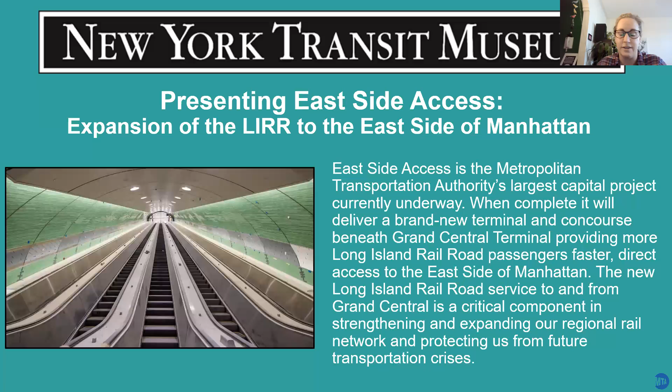In case you haven't visited us before, the New York Transit Museum started as an exhibition in the 1976 bicentennial, and it was so popular it became a permanent museum in the 1980s. In pre-pandemic times, we would serve more than 500,000 visitors a year. We are located in a decommissioned IND subway station in downtown Brooklyn, and we also have a gallery and shop in Grand Central Terminal. Our programs have gone virtual during the pandemic, but even though the museum is now open, we're continuing to host online programs on a variety of topics and for a variety of ages. The nice part is that this format really allows us to engage with museum and transit fans from all around the world. Thank you for being part of this today.

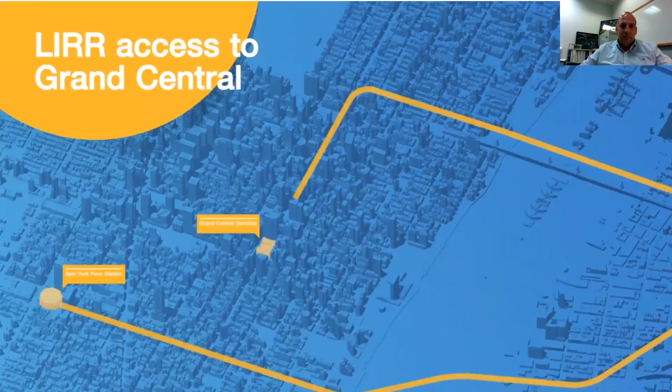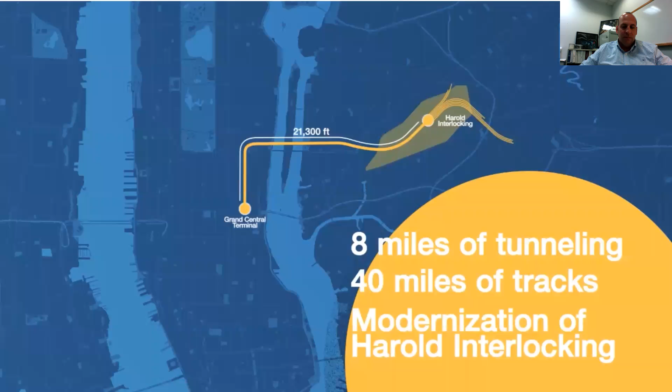Next, we're going to be just looking at a brief overview of the program with this video. East Side Access is the MTA's largest capital project, with work spanning 3 boroughs and extending deep below Park Avenue in Manhattan. The project will deliver for LIRR customers a brand new terminal and concourse beneath Grand Central, nearly 8 city blocks long, 8 miles of tunneling, 40 miles of new tracks, and the modernization of Harold Interlocking, the busiest intersection of passenger train lines in North America.

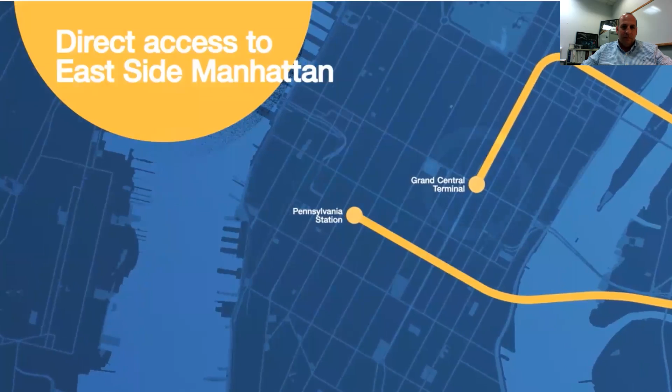East Side Access will deliver faster commutes, fewer delays, greater reliability, and more options for passengers. Long Island Railroad riders will now have faster, direct access to the east side of Manhattan, easing overcrowding in and around Penn Station. The project is also expanding and strengthening our regional rail network, protecting us from future transportation crises. East Side Access is the first expansion of the Long Island Railroad in more than 100 years. When the railroad was first built, 37,000 people lived on Long Island.

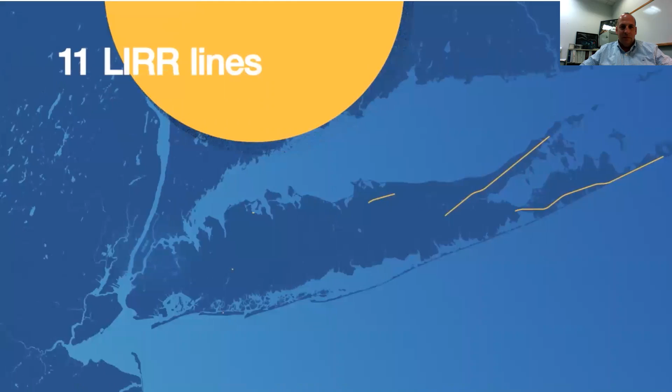We now have 2.8 million residents. To support that growing population, all 11 lines of the Long Island Railroad will now connect to Grand Central Terminal as well as Penn Station, saving commuters to Manhattan's East Side up to 40 minutes of travel time per day, adding up to 10 days per year.

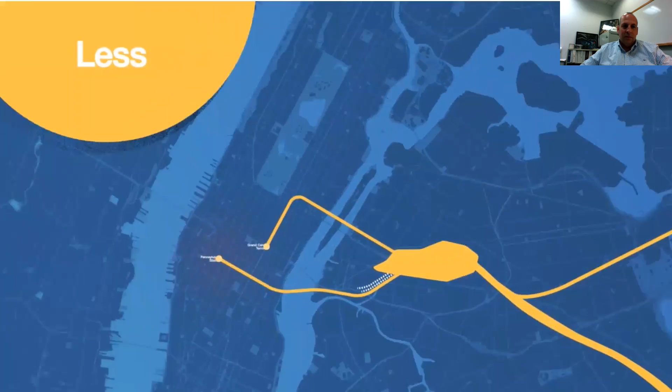With roughly half of Long Island commuters expected to go to Grand Central, there will be less crowding at Penn Station and on surrounding subway lines.

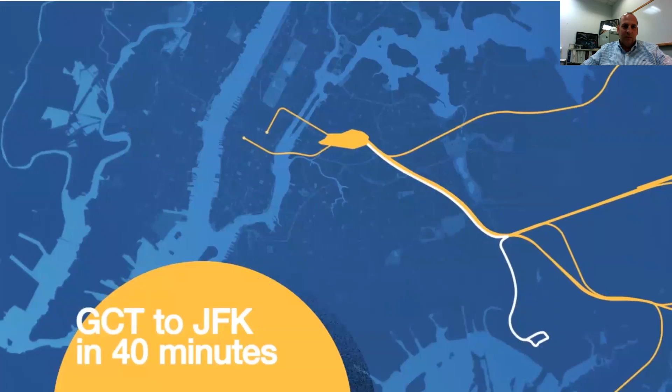East Side Access will create faster connections to JFK Airport, getting you from Grand Central to your terminal in roughly 40 minutes. And along with the construction of the third track and double track projects in Nassau and Suffolk counties, East Side Access will ensure we can meet the demands of Long Island's future population growth.

Long Islanders will be able to take full advantage of the job growth around Grand Central Terminal in the wake of the East Midtown rezoning. Better reverse commuting options from New York City to Long Island will expand job opportunities for New York City residents and help Long Island businesses attract skilled workers, strengthening the island's economic health and future prosperity.

Then there's the brand new Long Island Railroad concourse and terminal. Built directly below Grand Central Terminal and Park Avenue, the new 1,000-foot-long terminal can accommodate 8 trains at a time, enabling service for up to 24 trains during peak hours.

Passengers will have easy access to Long Island Railroad through multiple entrances along Madison Avenue from 42nd Street to 48th, and many more within Grand Central itself. There will be cellular and Wi-Fi coverage throughout the terminal, and all digital signage will provide real-time information about train departures. Overall, this new destination includes 350,000 square feet of new space, including 25 retail storefronts and space for pop-up shops to meet the needs of daily commuters.

A critical piece of our transportation system is Harold Interlocking. Built over 100 years ago, it is the busiest intersection of passenger train lines in North America. With nearly 800 trains passing through each day, the potential for congestion and delays is significant, impacting daily commuters.

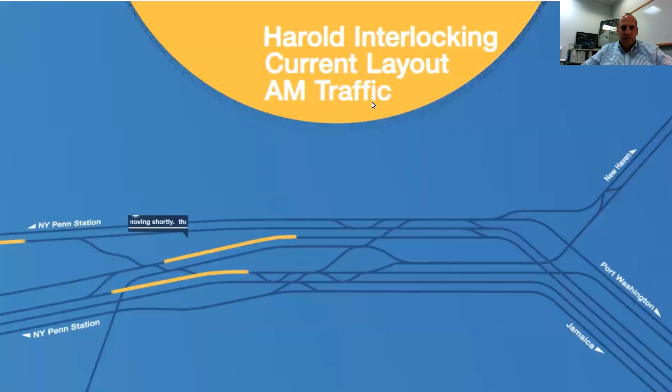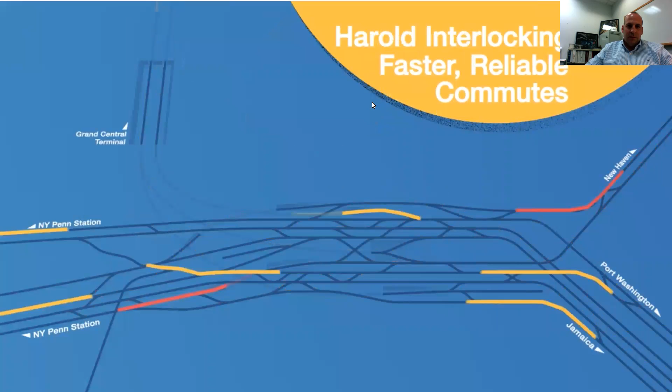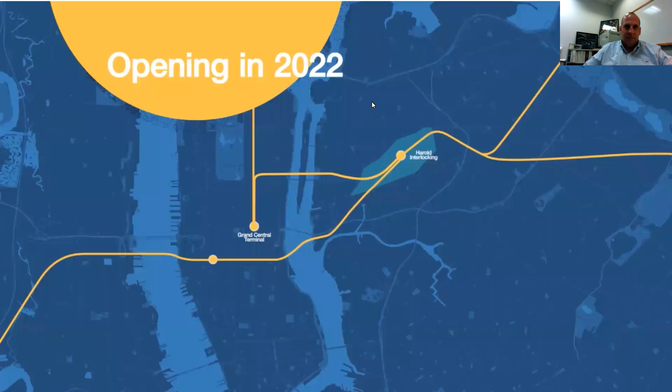So East Side Access is modernizing and transforming Harold to eliminate that congestion and reduce delays. Over $1 billion is being invested to make sure that you have a faster and more reliable commute now and in the future. This ambitious and transformational project for Long Island Railroad and the region's future is slated to open at the end of 2022. East Side Access will make our regional transit system faster, more resilient, more connected, and more reliable for our future.

So once completed, East Side Access is going to be changing the transportation in the region for generations to come. And there's several benefits that the video discusses. Next slide, please. Several benefits that the video discusses, like faster commutes and less crowding.

For a program of this magnitude, one can imagine that there's several key stakeholders, and I'd like to take this opportunity to thank our partners at the FTA and the FRA for their support. In addition, I'd like to thank our railroad partners, as there's a significant amount of coordination and planning that's required in order to build a mega project in and around active operational railroads.

So who is MTA C&D? MTA C&D is actually a subsidiary of MTA, and they were a new subsidiary that does the capital planning and development for all the operating agencies. Currently, they have over $51 billion in their portfolio for planned work over the next 5 years.

Let's take a look in a little more detail at the alignment of this project and what it'll be. So currently, you have the Long Island Railroad comes in from the east and goes through Harold Interlocking, where it connects with the East River tunnels going to Penn Station. And that's where all the Long Island Railroad service goes today.

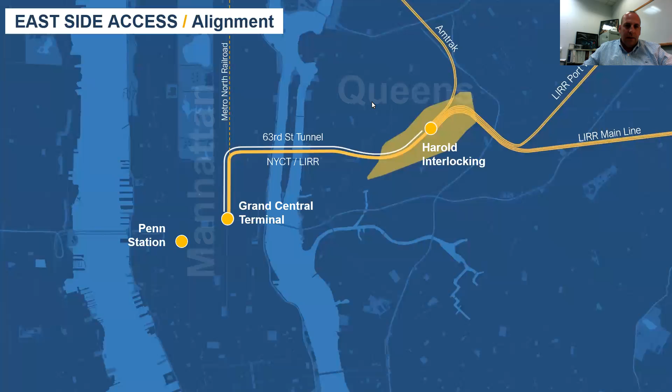And then we've also done a network of new tunnels in Manhattan and reconfigured and connected to Grand Central Terminal. So the new service will come in from the east, from the Port Washington or mainline branches of the Long Island Railroad, go into Harold Interlocking through new network of tunnels across east, going west towards Manhattan through the 63rd Street Tunnel, turn south down under Grand Central Terminal.

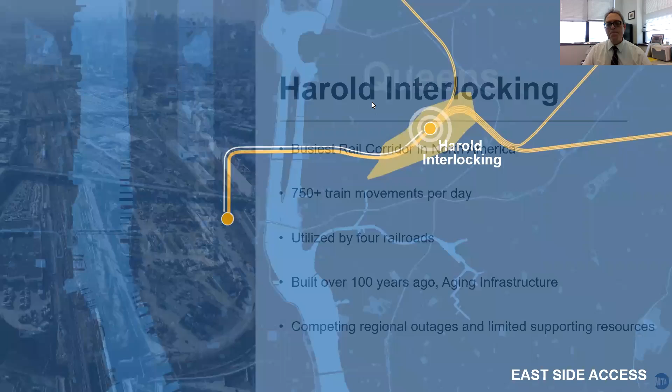We're creating a new alignment to bring the service into Grand Central. Harold Interlocking, as you guys heard, is the busiest rail corridor in North America.

Over 750 train moves a day, utilized by 4 railroads, predominantly Amtrak and Long Island Railroad. But you have the New Jersey Transit trains coming from Penn Station that also lay up in Sunnyside Yard, and occasionally we have a short line freight railroad, New York Atlantic, that comes through the interlocking as well.

All this goes back over 100 years to the Pennsylvania Railroad, so there's aging infrastructure, and that's been a big part of our project as well, rebuilding all that aging infrastructure. Some of the major challenges are the competing regional outages that are happening.

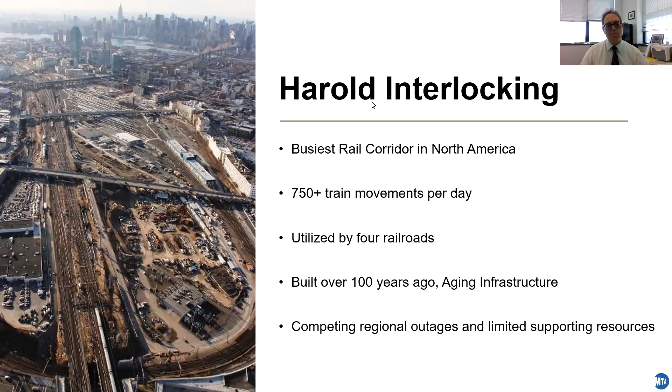Over the years there's just been a lot of work happening in the area, at Penn Station, West Side Yard, East River Tunnel work, and even work on the east end of Long Island. They all compete for the same resources, and the outages and maintaining the operation is always key. So that's something we've had to work through. Just the challenge of working in this active rail environment is really the biggest challenge we face in being safe. Next slide, please.

So the magnitude of the scope here is, we're putting in 95 new turnouts, putting in over 10 miles of track, and it's an expansion of the whole interlocking.

We've put in 5 new railroad bridges, replaced the signal towers, 313 catenary poles. Most of those foundations are dug by hand, pretty much because of the logistics. We cannot get equipment out there in the active rail environment with enough time to do it.

Also in terms of the expansion, we're putting in retaining walls, a new signaling system, new traction power systems. Going into the operational piece here, as I talked about, this mixing bowl.

So you can see here up at the top right, Amtrak coming from the New Haven line, Long Island comes in. Part of the issue here is that you have these mixing points, and these are points where the 2 railroads have to wait for each other, and it creates congestion.

That's some of the pieces that we've been trying to improve, as well as create the expansion of the tunnels for East Side Access.

So as this moves down to the west, you have the moves that go into the 2 East River tunnels for the westbound side, and then you have 2 East River tunnels on the eastbound side that come out. The Jersey Transit and Amtrak trains also make moves via the loop tracks that come around into Sunnyside Yard. Move to the next slide.

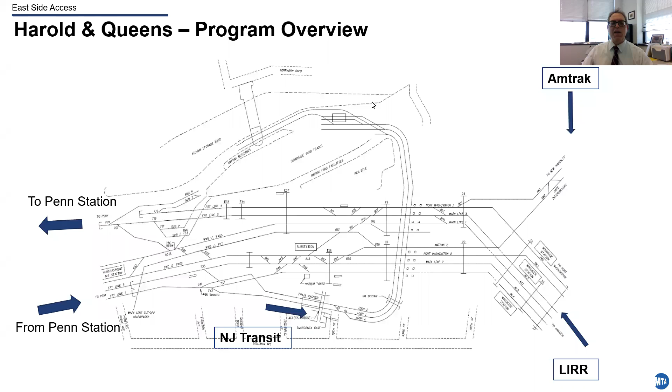But for the core East Side Access, we have a new midday storage yard up at the top there. We have the 3 bore tunnels into the middle of Harold, with the approach structures coming up to the daylight there. We have a series of track switches, and then we also have the railroad bridges that support that expansion.

We also put in railroad bridges for that expansion of what we call the westbound bypass on the top side. There's an eastbound reroute, which comes up in the middle for the Amtrak moves to remove some of those conflicts when they come out of these river tunnels there. And then we're also improving the moves on the loop tracks.

So there's a replacement car washer for Amtrak, a rebuild of the loop interlocking, a creation of a new T interlocking as they make moves going around into Sunnyside Yard. And again, it's increasing capacity, speed, and just overall reliability.

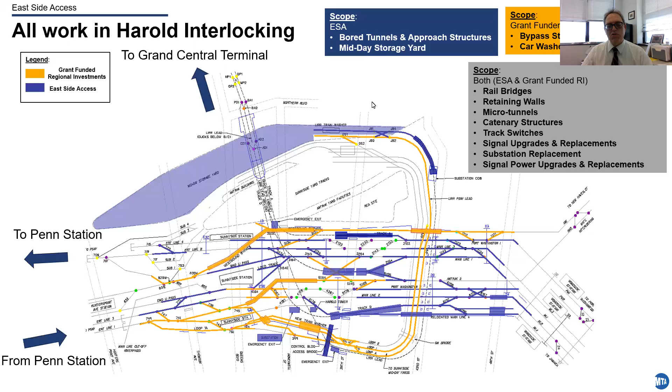Next slide. So I just want to give you guys an overview, and this will get a little bit busy, but just to give you a typical day of the moves that will be happening once we open up. This is going to be like your AM moves from Grand Central. The Long Island Railroad will be making a move from Grand Central.

You can just click through this as I talk to it. Into the midday storage yard. Also, Amtrak and Jersey Transit will be making moves into Sunnyside Yard. And then the Long Island Railroad will also have the ability to make moves from Penn Station into their midday storage yard.

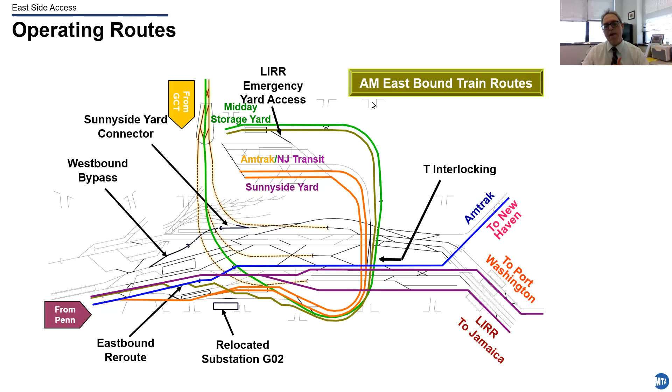Amtrak will make moves here through this new eastbound reroute, removing those conflicts that we talked about to get up to the New Haven line. And then the Long Island Railroad will be making moves from Penn to Port Wash and to Jamaica. And then you can see from Grand Central, they'll be making moves to Port Wash and to Jamaica.

And then we move to the westbound moves. So here it is, the Amtrak coming up into the expanded right of way, removing that conflict that exists, going to Penn. And then we have the Long Island making moves into Penn, Grand Central.

And then we have the ability to use the bidirectional tunnel to also make moves into Grand Central and still make other moves into Penn. And then Long Island will still have their Hunters Point service, which is a diesel fleet coming into Long Island City. And then we have additional capacity to make further moves into Jamaica and Penn with these next animations.

And then you can still see that the areas that aren't colored still gives you some flexibility to recover if there were some impacts. Moving on.

So really the biggest challenge that we've had working in Harold is all of the detailed staging, planning, and coordination to respect that active railroad environment. Getting track time to do the work is very challenging, and to make sure that the railroad operation is never affected is very challenging. So our planning has to be long range and very deliberate.

The implementation of all this work required 24 stages of signal cutovers to create the footprints to advance all the civil work. And any change that we made along the way to change that sequence required a host of software changes and hardware changes. So it's very challenging.

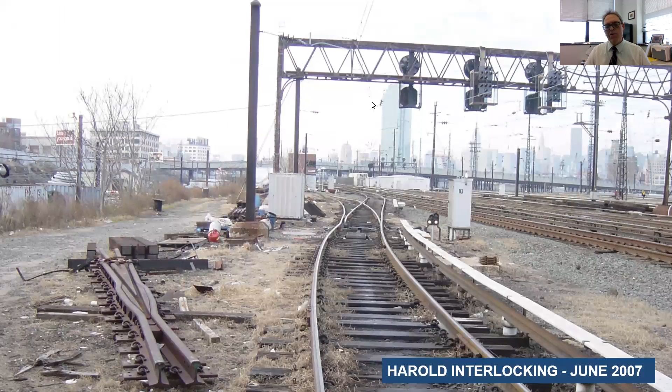So going back at the start of our work here in Harold, this shows you what the interlocking looked like. Also pay attention to the landscape in the background with the buildings. At this point in time, you can see just the Citicorp building.

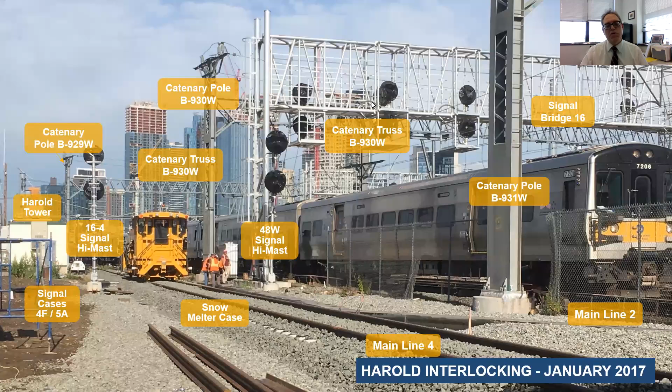When you move to the next slide and look 10 years later, you can see all of the work that we've done, but you can also see the expansion of Long Island City that's growing. This just goes to show you how challenging the work is. We have constant train movement - every 5 minutes or so in the rush hours, you're going to see trains sometimes right on top of each other. That's really the biggest issue that we have.

All right, I'm going to introduce a slide now showcasing work that we did in the summer of 2018 when we installed the Northeast Quadrant. This was work that we did under a 30-day outage. Again, it took us years of planning and coordination and getting approvals from the Long Island Railroad and Amtrak for them to write a service plan to cancel commuter trains and allow us to put in approximately 9 switches, removed 5 switches, and put in over 4,000 feet of track.

On one side of this, we had the Long Island Railroad doing their direct force account, doing portions of track and switches. On the other side, we had a third-party contractor performing track and switches. We had to orchestrate all of that. Then as we got done with all the track work, we transitioned that to Amtrak to do the overhead catenary wire. We also had the Amtrak and Long Island Railroad signal crews participating to do a final cutover at the end. So this is just going to showcase that for you guys to see the work of that in 30 days.

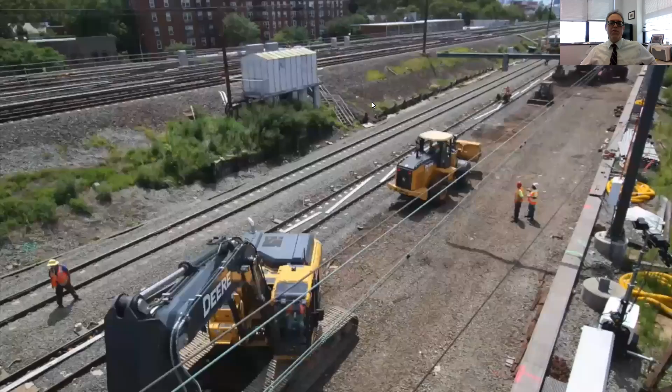Before this point in time, we were only able to get up to a 2-week outage, so this was really our first major test to do something with 30 days. We came out of this meeting schedule with no incidents or issues. We had to work very closely with both railroads and our contractors and have daily coordination meetings, around the clock to make sure that everything was achieved on schedule.

So from that point in time, we came away with further extended track outages to the point that I mentioned. Right now, we have a 1-year outage to do a cut and cover short tunnel excavation in the middle of Harold that we're in the process of doing.

Now I'm going to turn more towards the Queens side and the tunneling work that ties directly into Harold - that's where all these tunnels daylighted. I'm going to walk you through from the beginning to how we got here now. In the Queens area, this was all soft ground tunneling, as opposed to the work that Mike will talk about in Manhattan - they have hard rock tunneling, so a totally different mining process.

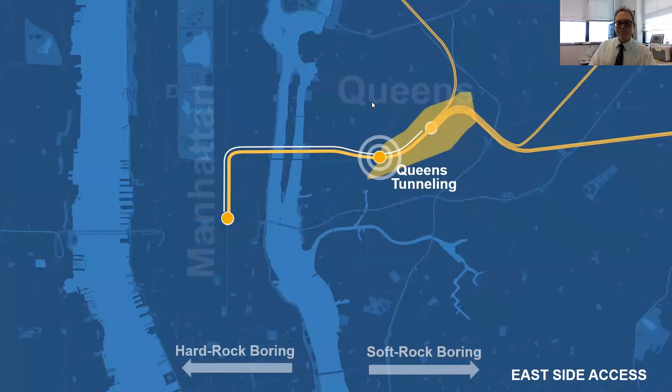Next slide, please. So just to show from an isometric viewpoint here, this is in Long Island City, right by Queens Plaza and in the Sunnyside Yard area. Right off of Northern Boulevard, we built the launch shaft here - this is what we call the Q-tip. This is where we build a series of slurry wall panels and bracing and tiebacks to create the launch shaft.

We dropped the TBMs in here once we had it fully excavated, and we did 4 tunnel boring drives using 2 machines. Once we drove out one machine, we would have to capture the cutter head, bring it back, and relaunch it. On number 5, Mike will talk about this, but this is the Manhattan launch shaft - there's the tunnel bell mouth. We did an open cut excavation on the other side of Northern Boulevard, where we dropped the TBMs down there, and then we drove them down through the 63rd Street tunnel into Manhattan.

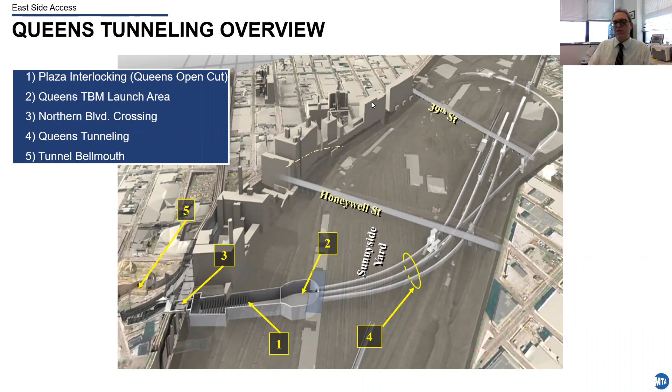So in addition, I'm going to talk about the Northern Boulevard crossing later on, where we actually tied those two launch shafts together, and that was a very challenging piece of mining. Move on to the next slide.

So in 2003, this is really when the work first started. Going back, there was a freight rail yard here that was the Long Island Railroad's that we took over. We removed that yard, and this has become the staging area for all of our work here to support the work, not only in Queens, but in Manhattan. So all the muck that came out of Manhattan actually came right out here into Queens, and nobody in Manhattan was the wiser. Mike will talk a little bit more about it. But we also had to demolish a series of buildings to create the footprint here to develop this launch shaft.

Next slide. This is just another viewpoint of the same area here in Queens as we started to lay out and get ready to set the slurry wall panels in.

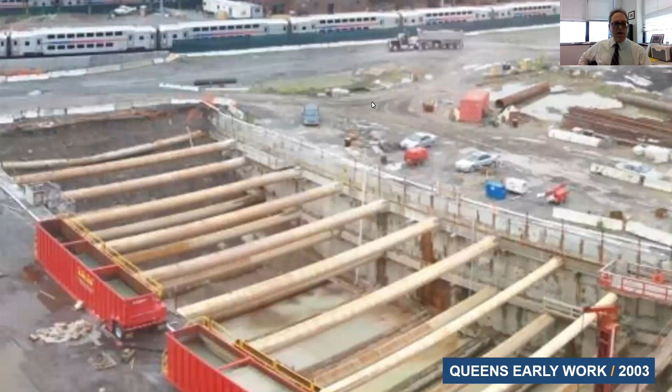And now this is our actual excavation. With the slurry walls now built, we had to start looking at how we're going to move over into Sunnyside Yard. So when you see that train in the distance, we had to build slurry wall panels where those trains are. So we had to come up with a temporary alignment to shift those trains further into the picture here temporarily, so that we could go in, build the slurry wall panels, build a deck bridge, which would stay there, and then build the slurry panels and put the bridge in, then put the trains back in service, and then finish this whole excavation once we had it tied in.

And then we'll see that on the next slide here. So now this is further expanded, so you can see here that we've been able to build that bridge that we're housing the trains, and now that's actually in Sunnyside Yard. So we've expanded this, and now we're excavating out the launch shaft.

It was mostly soil, but as we got down to the bottom, we actually encountered rock excavation, and we had to do some drilling and blasting of that and form out the rock excavation. Next slide.

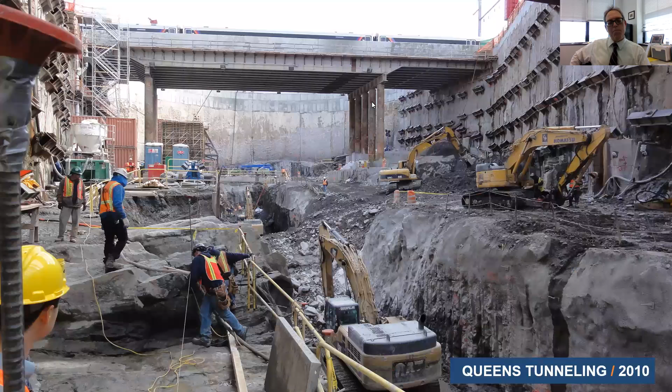So this is down below, and we're in the middle of the rock excavation now, setting the stage for the final pieces of the launch shaft. But you can see the deck bridge that's carrying the New Jersey Transit trains above, and the curved section at the top there is the Q-tip area.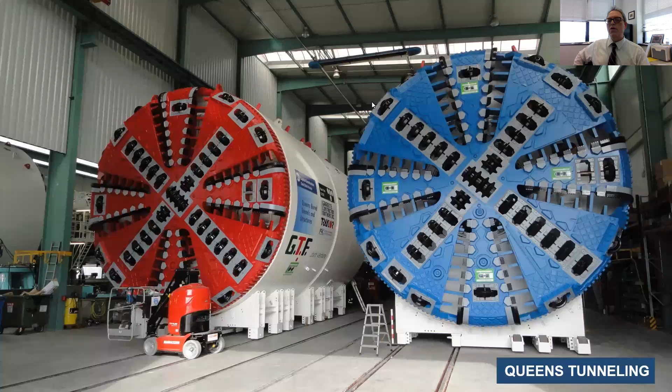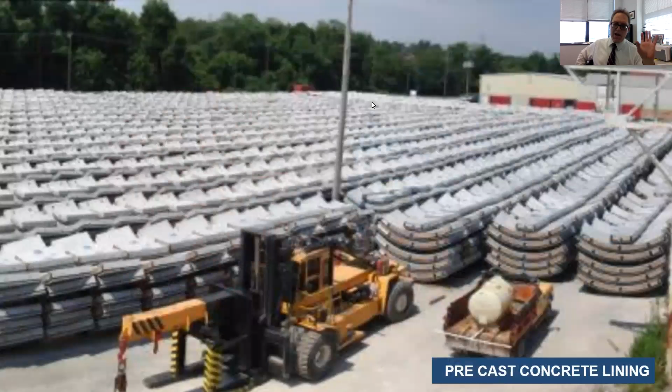So while that's all going on, we were procuring the tunnel boring machines that I mentioned. So we had two machines coming here, and then also concurrently, all of the tunnel sections were precast liner. These were all fabricated at a plant upstate New York, and then those subsequently got delivered here to the Queens site. To support all this mining operation in Queens, it was really its whole operation. We had our own substation for this, and we had a slurry plant that just supported this operation. And then once the mining would start, the precast liners would all feed into that as well.

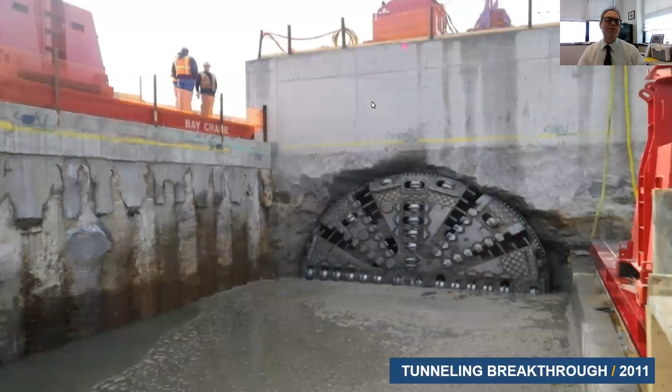And then we had the final breakthrough of our first drive. This got actually bored into Sunnyside Yard. We captured the cutter head, then we bring it back to the launch shaft, and then we started the next drive.

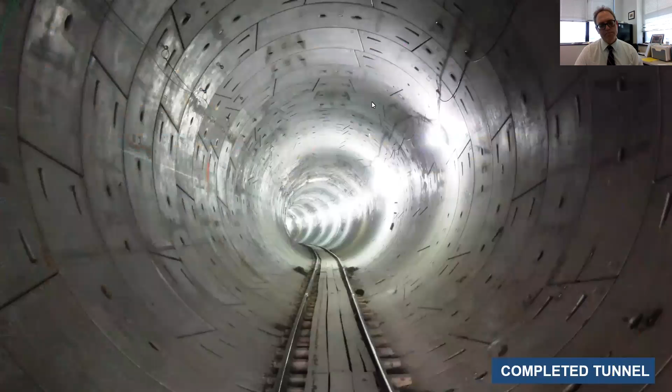And this is just a picture of the finished tunnel, so you can see all the precast liner segments coming together.

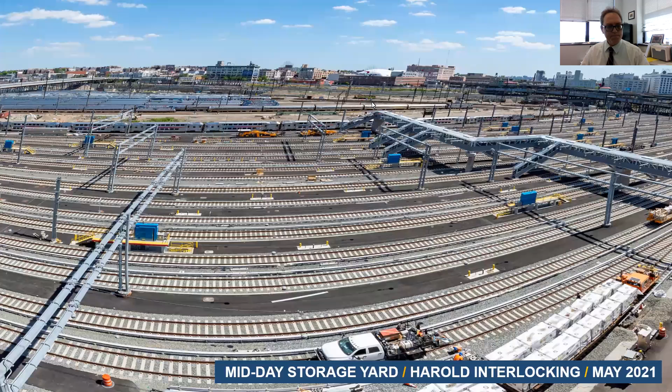One of the biggest challenges, now that we're done with the Queens mining, is connecting the Queens launch shaft to the Manhattan launch shaft. It's 110 feet that goes under Northern Boulevard, but it's a very challenging area because we have the elevated subway, the N and Q lines, and Northern Boulevard there. Below that, we have the IND subway, which carries the E, M, and R lines. We have to come in with a short tunnel section that goes under all that, so we're not allowed to do any open cut excavation. It would be impossible because it would affect all of these lines.

We had to come up with a different tunneling method. Here's a cross section of the area we're trying to get across. You can see the BMT columns and supports, and the piles that come down right into the tunnel section. So what we needed to do is come up with an underpinning system to shore up and temporarily support those piers and the piles.

At the same time, to go across the 110 feet, we installed a frozen jack arch system. We installed a series of freeze pipes longitudinally going all the way across between the two launch shafts, and circulated water and brine through a network to freeze the ground, create a frozen arch, and stabilize it. Then we came in and did a concrete liner, followed by separate short excavations and temporary shotcreting all the way across. So it was a sequential excavation to go through that.

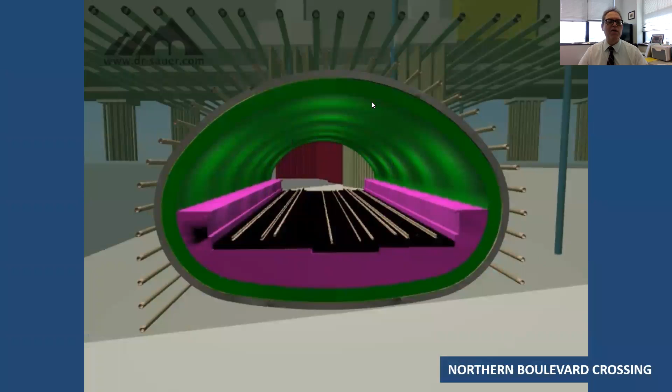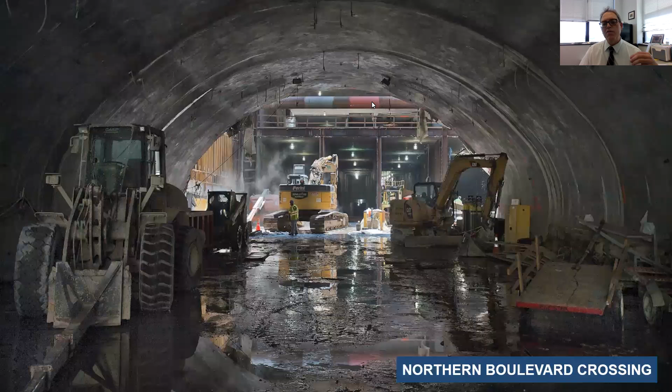Then we put the waterproof membrane on, then the final liner, and then we build the track bed, and we're done. This is the most expensive tunneling we've done on the project—a linear foot of this tunneling is approximately $880,000. So for the shortest section of tunneling, this was the most challenging piece we had, though not to say the other parts Mike talked about are any less challenging.

So with that, I'm going to turn this over to my colleague, Mike Pujdak, and he'll talk to you more about the Manhattan tunnel. Thank you.

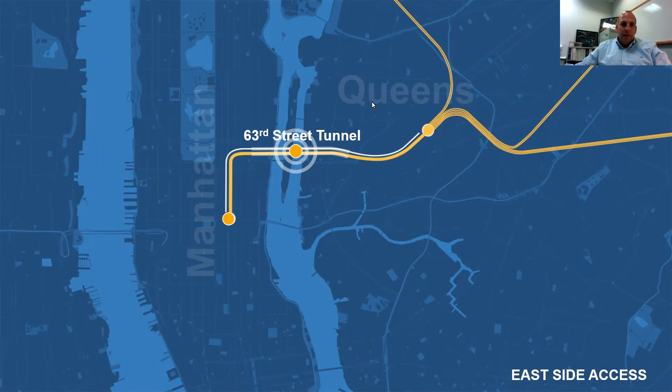Thanks, Pete. So we're going to start by talking about the existing 63rd Street tunnel. This tunnel segment was under the East River, and this was a portion of the tunnel that we used in this new alignment to get the trains to Grand Central Terminal.

This project, the 63rd Street tunnel, dates back to the 70s, and it was a bi-level tunnel with two tracks on the upper and two tracks on the lower level. The upper level got outfitted with New York City Transit, and the F line currently runs service through there. But the lower level was always reserved for this project. So now we're into the portion of the job where we've retrofitted the tunnel.

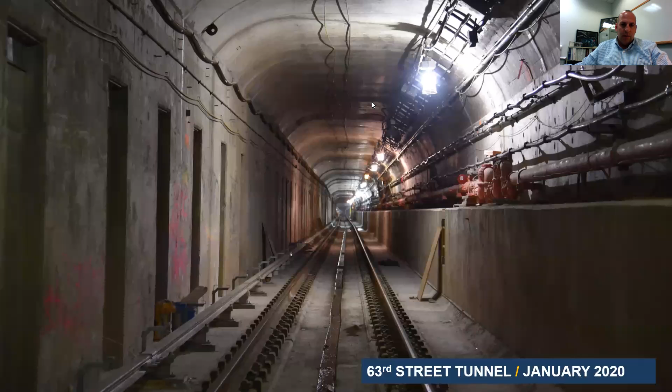Next, I'm going to talk about the Manhattan tunneling and excavation. I think the key here is to understand the complexity of the logistics.

We had all this mining that we had done throughout the Manhattan alignment down towards Grand Central, under Grand Central, to build out caverns. All that material had to go back out through the existing 63rd Street tunnel. It actually went out to the shaft that Pete showed you in Sunnyside, because we didn't have the Northern Boulevard connector yet. So we went up and over Northern Boulevard with a conveyor belt and laid up all of our muck in the yard so it could be trucked off site. That was one of the conditions of the EIS, not to have a footprint for construction in Manhattan.

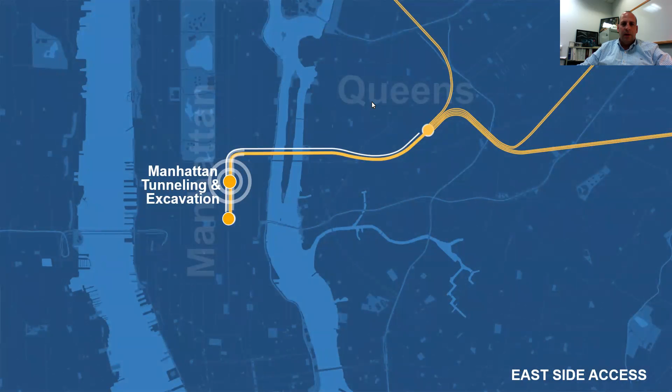So we moved 1.5 million yards of excavated material, and we're going to show you some complex building of structure that was all done without access in Manhattan, with the exception of some drop pipes we installed for concrete access. The other piece is that all the work at the Grand Central Terminal location was actually supported through Metro North from work trains from the Bronx. So we built the Manhattan tunnel, the East Side Access Project, from either access in Queens or access in the Bronx.

Next slide. So we're going to focus on the right-hand corner here. This is a cross section through the project. You're looking at Park Avenue in the central right side of the page here. You can see that Grand Central is basically 2 stories, with track platforms for Metro North, an upper level and a lower level, and we're deep - well below Park Avenue, about 150 to 160 feet below, right down the center there.

In our final configuration, we have two caverns that are 3 stories high each, and it allowed for a platform on the upper level, platform on the lower level, and a mezzanine for passenger flow. So if you come in at the upper or lower level, you would take an escalator or elevator to this mezzanine, and then we'll get you out to the street.

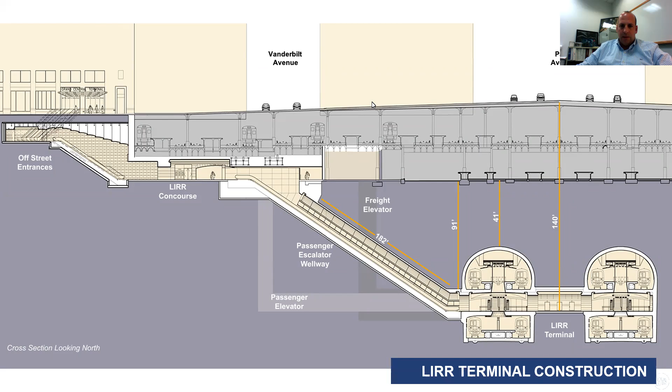Next slide. So these caverns are 60-foot wide, 60-foot high, and 1,143 foot long. Just to get a sense of the magnitude, it's several city blocks long - underground excavated space as two continuous spaces, and it rivals some of the iconic skyscrapers in terms of its length.

In terms of Manhattan tunneling, we utilized two different hard rock tunnel TBMs. We have different geology in Manhattan - we're in Manhattan schist. As we excavated, we did rock support, either an array of bolts, shotcrete, or steel ribs, depending on the geology. We had an extensive amount of geotechnical borings taken to understand the geology and what we would find. The ground behaved as we thought - it was in excellent condition.

If you can see the center picture on the bottom, you usually don't bring your rock cut to a razor edge, but that's the kind of ground we were dealing with. It was 35,000 PSI rock.

Overall, we did 8 tunnel drives with the 2 TBMs, recognizing we had to muck all of this out through conveyors back to Queens. We did 6 miles of hard rock tunneling. Took 5 years to do. We had no receiving pit - a little different than what we had in Queens, where we had receiving pits. There, we were able to pick up the cutter head and bring it around via trucking transport, then relaunch. Here we had to pull back our machines.

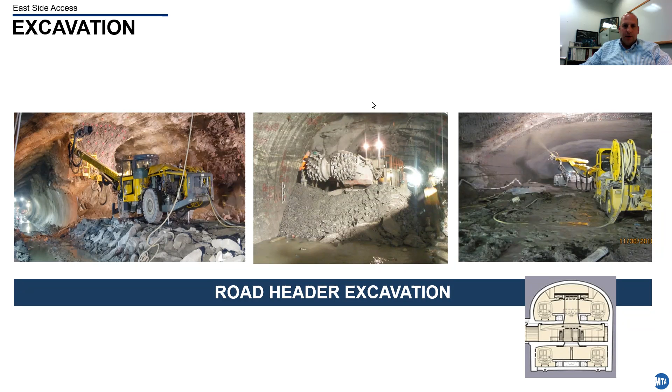Next slide. So if we look at our caverns, once we did our tunnel drives, we basically did 4 tunnel drives through the station cavern. If you look at the bottom right-hand corner of this slide, you'll see 4 trains, and those are where the 4 tunnel drives were. Now we're going to start constructing our station caverns.

So we started carving out the upper piece of that station cavern by a combination of a road header machine and drill blast. Here you can see excavation ongoing - this is bench excavation, and this was drill blast.

In this, we took 2,700 blasts under Grand Central. There was a significant amount of coordination we had to do with Metro North as we were blasting below their active train shed. This was years in the making, with a lot of coordination with Metro North, a lot of instrumentation, and typically we would blast at night.

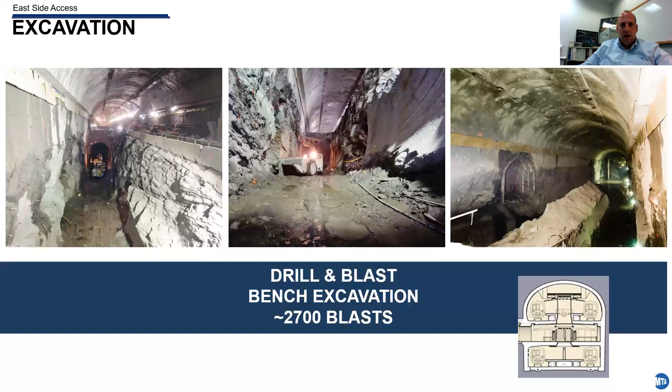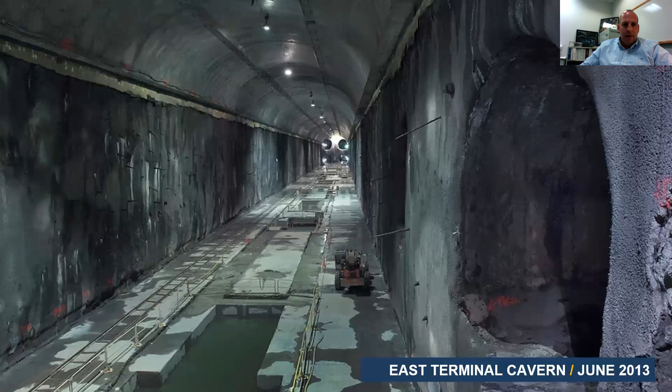So here you can see we've now poured a mud mat and sprayed shotcrete on the walls to get them smooth, to get prepped for our waterproofing material. Just another angle of the cavern. Next slide.

Here you can see, I didn't talk about it, but we have a concrete arch that we already installed early on when we did the top heading. That's haunched into the rock, into a rock haunch. That way it's self-supported, and it helps protect against any shift in movement of ground above us. And that's waterproofed above that, and then the yellow PVC membrane is the waterproofing membrane.

Basically it puts a big umbrella around the cavern. It's a drained and open system, so the idea is that any water that percolates around the cavern arch or down the walls will be behind that waterproofing material, then caught in our water collection and drainage system. In this case it'll all pump out and drain out to 37th Street, which is our sump that gets pumped out from.

Here we've got the waterproofing completed. You can see the water barrier is kind of trimmed out in blue. That's given us little segments to deal with any areas that we may have to do leak repairs. There's also grout hoses in those sections.

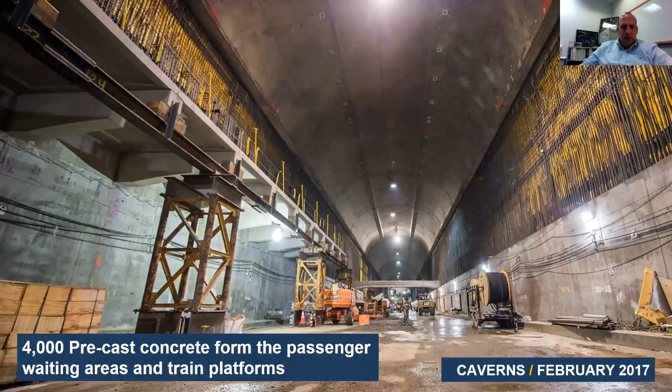But then the next thing we see in this picture is the lower walls were cast and constructed, and now we're going to start building our structure. So we turned to a kind of hybrid method, with cast in place walls, and a lot of the flat members, the beams and planking, were precast pieces. We had over 4,000 pieces for the two caverns together. This was done by Fort Miller, upstate New York, and erected by Tutor Perini.

Next you're going to see a video, which basically shows you how you build a ship in a bottle here. You can see us laying up the precast beams and planking, and the upper level being constructed in the rear of the cavern. Overall, we constructed the structure, the balance of the walls and beams, in 1 year for both caverns.

Significant amount of work ongoing. We worked 3 shifts a day for the last several years.

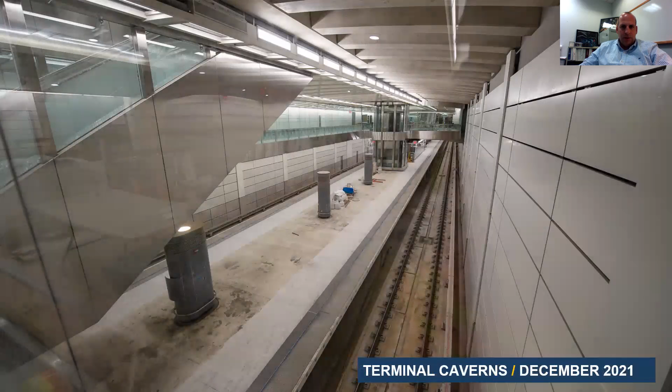This is what it looks like today. Since we finished out the structure, we've come in with all our MEP. We built out platforms, we built out track, and architectural finishes have been installed. We're working on doing the terrazzo, grinding out and polishing the final terrazzo, and testing. Escalators are installed, you can see one on the left side of the slide, and further back on the platform you can see the elevator, the public elevator, and the glass enclosure there.

In this section on the lower level, we actually have a double high space, because the mezzanine is in that grayish blue, greenish blue glass. It's only half of the side of the mezzanine, so you have this double high space, free of columns. And this is what the cavern looks like today, the station terminal.

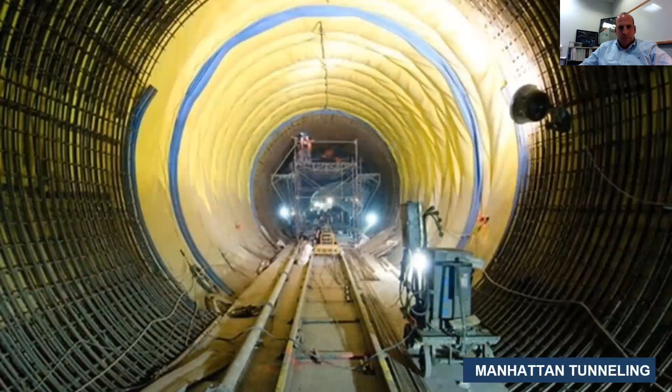So all the tunnels that we had excavated also had to be waterproof and lined. While we were doing that work in the cavern, we were also coming through and setting up access, since we were feeding the job from Queens while building out other tunnels. This is the waterproofing going in and reinforcement, depending on the rock zone. Then we cast the concrete.

Here's a picture of what the crossover looks like, going into two of the Ys heading into the station cavern.

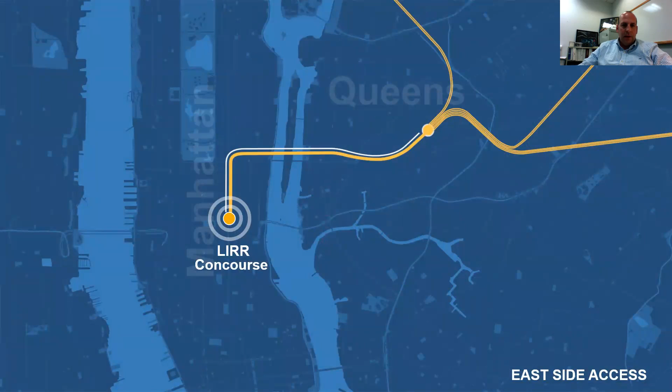Next I'm going to talk about the Long Island Railroad concourse. This is where we're connecting under iconic Grand Central. One of the awesome things about this project is that thousands of people come to Grand Central every day for commuting and tourism, and we've been building this job for years without anybody knowing we're building directly below their feet. It's going to be amazing when it opens.

One challenge was finding space to house a concourse to support a project like this. What we did was take over the west side of the lower level of Grand Central, called Madison Yard for Metro North. We actually built Metro North a new yard up near Yankee Stadium in the Bronx, which allowed them to vacate that space and let us start transitioning those 8 city blocks into our future concourse.

This is a view of the concourse stretching from 42nd Street all the way up to 50th Street.

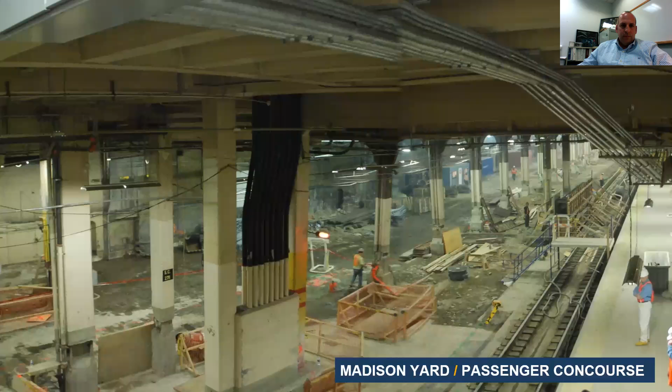As I said, it was an old rail yard, so the first thing we needed to do was demo it out. It had crash walls and columns everywhere, and you can see some of the demolition work going on in this picture.

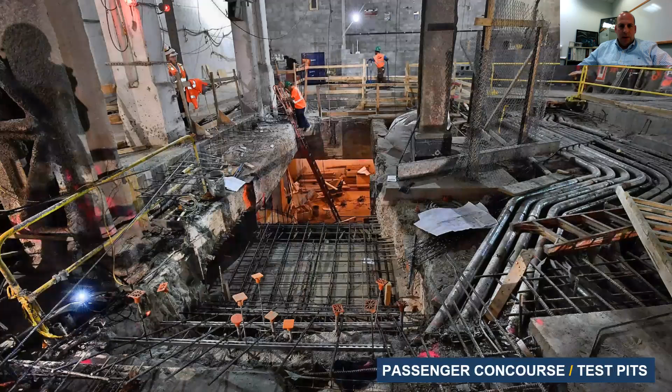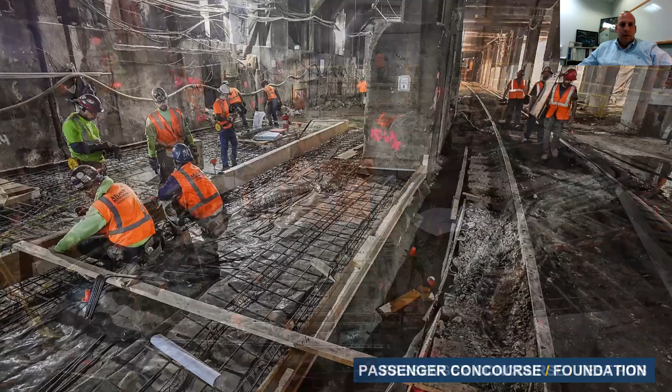Next we started doing our subgrade utilities and slab work. Here we're punching into the 45th Street cross passage, trying to make a future connection to that passage. Here's another photo of the slab work and subgrade work going on in the concourse.

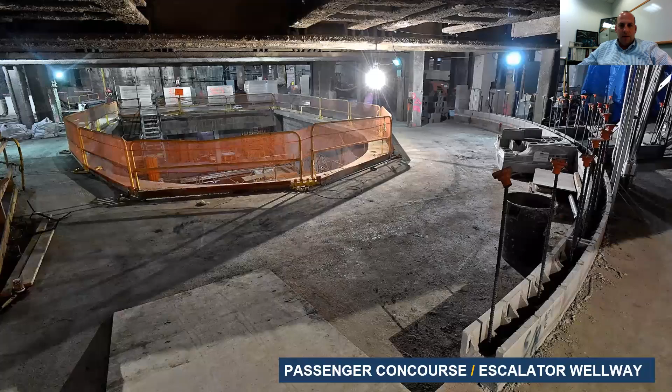Next we get all the flat work done and start working on getting our walls going and our MEP going. You can see we're bringing in our MEP and our CMU walls going up, and starting to form out the rooms.

One unique challenge here was that we actually had to build a structure within the structure for a lot of the space. We have our own roof and decking to separate ourselves from Metro North, with all our utilities above it, plus a gutter system and waterproof deck to make sure we don't have leaks in the public corridors.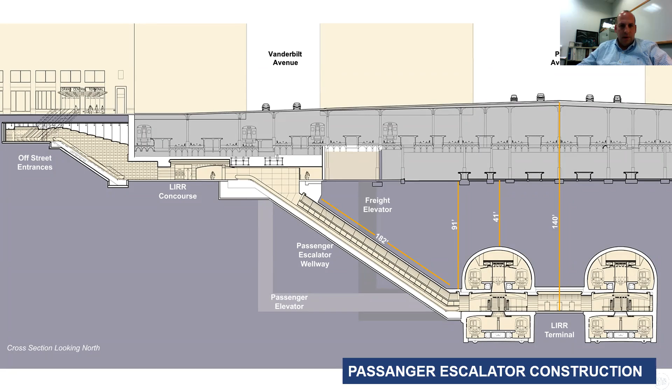We had this forest of columns and space, so we needed to figure out how to connect these large banks of escalators. We had to do a major structural reframing, bringing in some 65-foot long girders that went knuckle to knuckle on rail cars. We had to take them off rollers and roll them into place. These are roughly 4-foot deep beams with 4-foot flanges, with no headroom and no overhead cranes.

We had to use Hillman rollers to get them in place, jack them up, and basically stick-frame all the structural reframing around the columns so we could do load transfers and take out the trains, the service of the trains above, the DOT viaducts. We had to get lane closures, jack the whole structure up, cut the columns, get everything resupported, so we could clear the space just to find room to build our escalators.

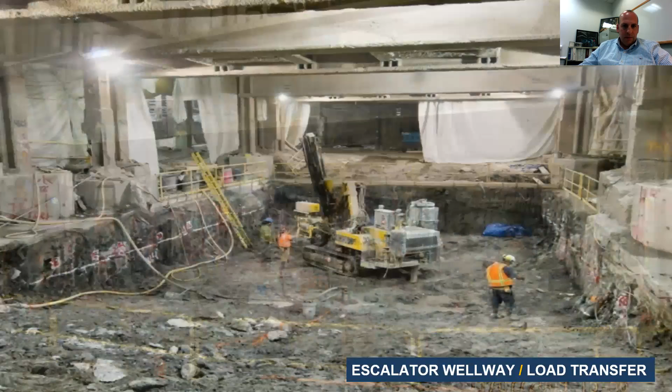Here you can see now the reframing is done of the train shed for this area, and we started our mechanical excavation. We had a requirement to do our excavation down to 17 feet below the footings before we could start our drill and blast.

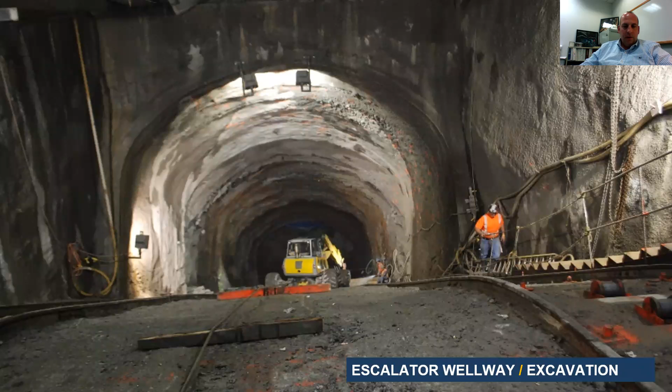Here we are turning down the slope. We're on a 30-degree incline, and we did our drill blast excavation. As we got further down the shaft, we were able to take larger rounds. We started off with 4-foot blasts, and that opened up to 6, 8, and 10-foot as we got down. At the very end of that little tunnel, you can see a faint blue right past that machine.

That's the tarp on the other side of the cavern, so we had made our connection. Obviously there's a challenge working on this kind of a slope for men and machinery. But once we excavated it down and got our initial shotcrete in, the next step was to do our waterproofing and lining.

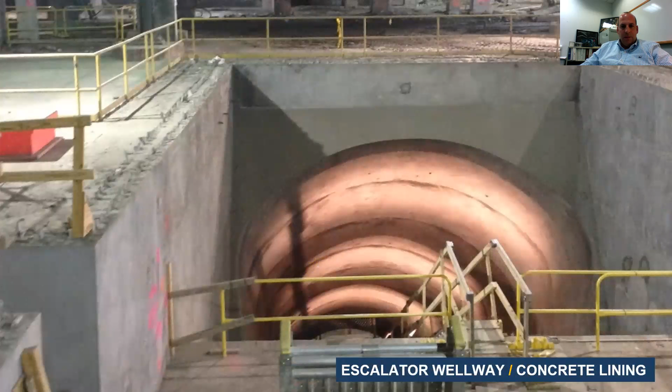Once that was done, then we got into our MEP, architectural finishes, and installing our escalators. Overall, these are 182-foot long escalators, some of the largest in the country. And that's what they look like today.

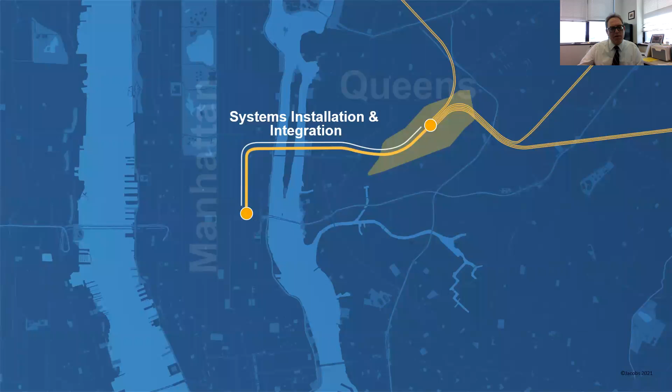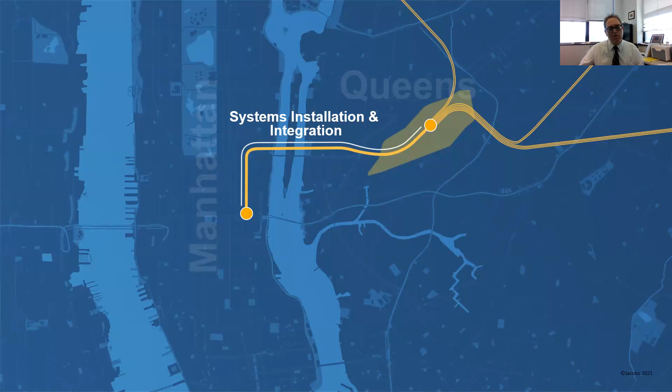So I'm going to take us through the last phase of the job. Once we got all the heavy civil work done, we still had a major challenge ahead of us to do all the systems installation and integration, to keep pace with this and to connect it into the active systems we have in Harold Interlocking and for the Long Island Railroad. Those systems go all the way back to Jamaica and also have connectivity into Penn Station to keep the proper communication.

So we have a multitude of systems here, very complicated. All this work is over $1 billion. We had 4 major contracts to do power systems, control systems, networks, ventilation, signaling, fire life safety, radios, and then system integration and security. Very challenging to bring all this home.

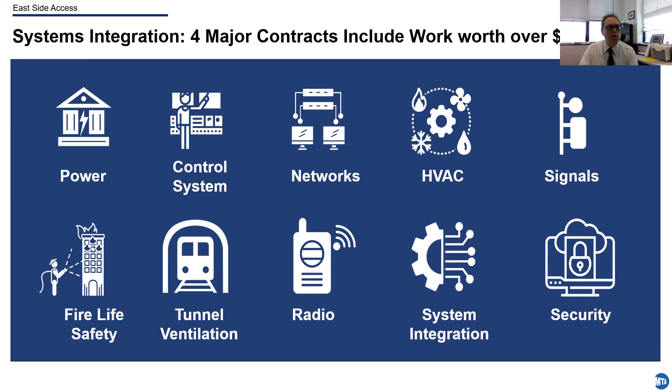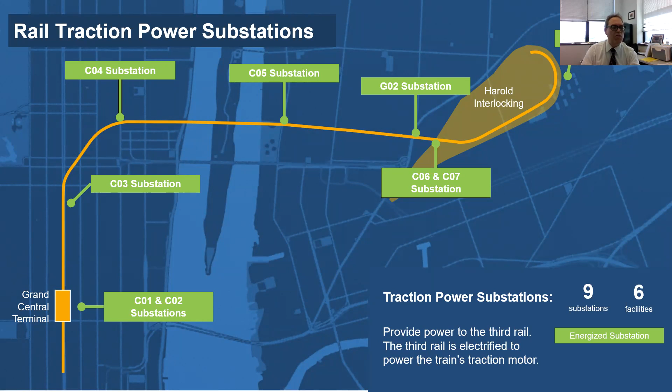Just to put it in perspective in terms of the overall alignment, this shows the traction power substations. We have them starting in Queens near Harold Interlocking, working our way down through the existing 63rd Street tunnel that Mike talked about, and then several throughout Manhattan, and 2 over at Grand Central themselves.

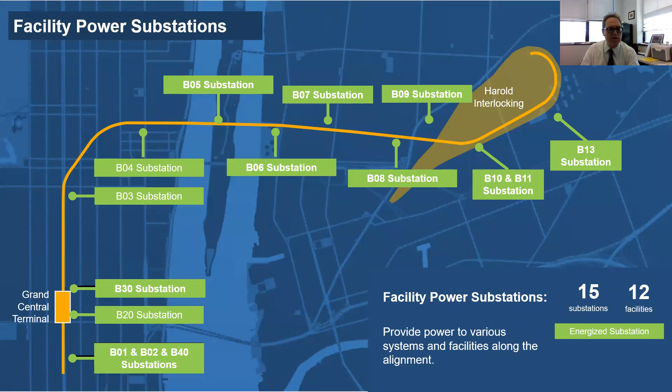And this shows the array of facility power substations. We have 15 facility power substations across the entire alignment, which support all the other systems we have, between the tunnel ventilations and all the other system pieces.

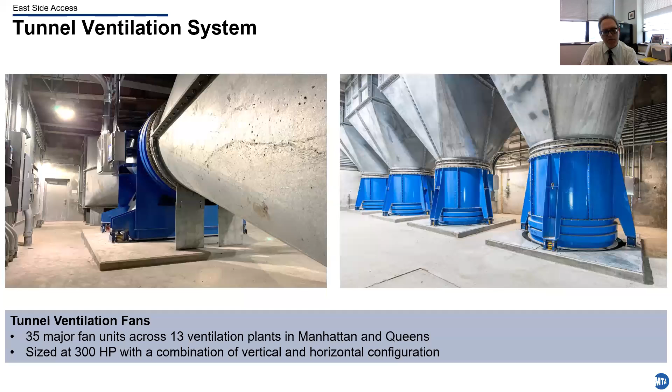On the tunnel ventilation systems, we have, as I mentioned, 13 vent plants scattered around through Manhattan and Queens, sized at 300 horsepower. Some of them are in a horizontal configuration and some of them in a vertical configuration.

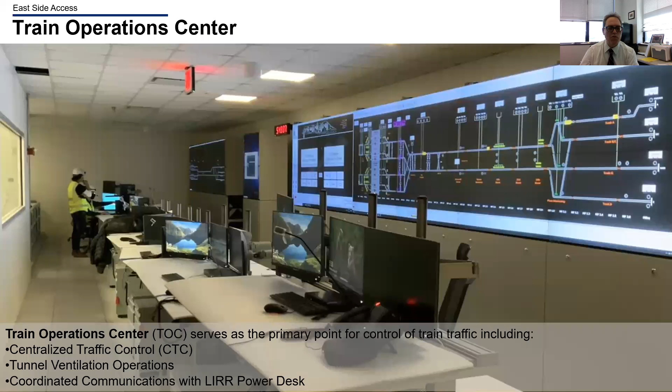Here's a picture of what we call the TOC, or the Train Operations Center. This is essentially the theater where they will make the moves and dispatch the trains. This is all coordinated with the Long Island Power Desk.

And here is the other, the Terminal Management Center, that controls all the different facility systems between ventilation, all the different building management systems, the elevators, escalators, smoke exhaust, and fire life safety.

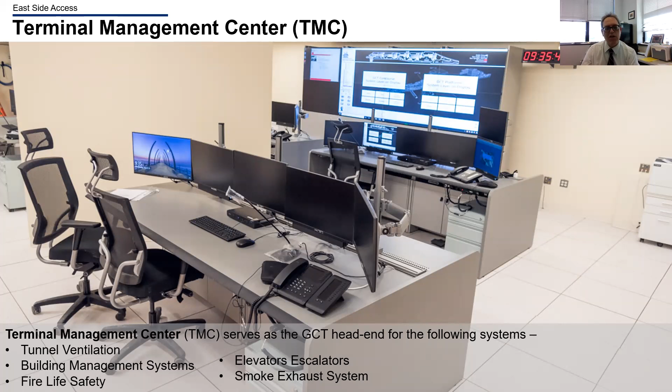So we are working to deliver this in this calendar year and make the revenue service happen. It's been a long road for me and Mike, but we've had the pleasure of seeing this from literally just pencil to paper as a concept and being able to see it all the way through this final phase. Thank you.